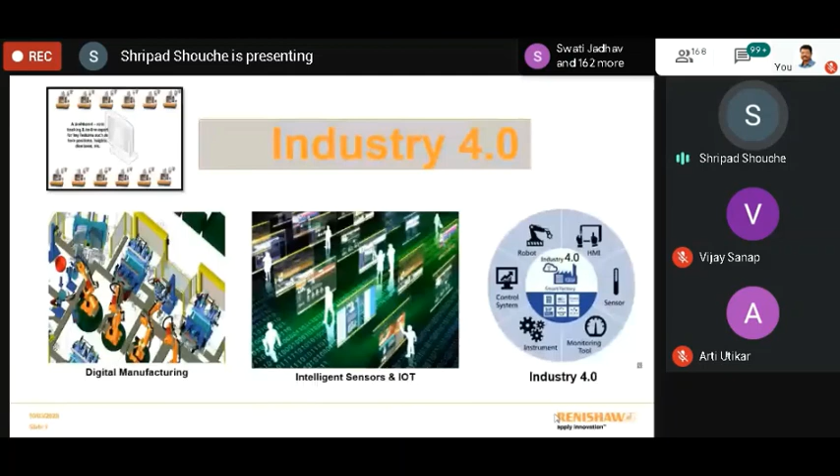Industry 4.0 acceptance happens at various levels - not only the factory, but plant, machine, as well as the individual instrument level. So that is the total session.

So, okay, starting with Industry 4.0. I think each and every student sitting in this session knows what really Industry 4.0 is. In short, Industry 1.0 was purely mechanical, we can say, where steam engines and everything played a major role. Then when we talk about Industry 2.0, mechanical along with electric energy played a role to increase efficiency.

In Industry 3.0, basically robotization got added, automation got added, but all the activities were still put together with different roles. Now we have achieved mechanical, electromechanical, as well as automation, but still there is scope of improvement, and that's why we call this Industry 4.0, the fourth revolution in the industry. Industry 4.0 is a German word, but other countries use different words, like China calls it China 2025.

So every industry talks about it in a different way, but the overall objective is how to make your existing setup or manufacturing smart enough so that it will work on its own without manual control or manual intervention. That's why they use the word cyber physical. The next video will give good clarity on how Industry 4.0 and the trend has shifted.

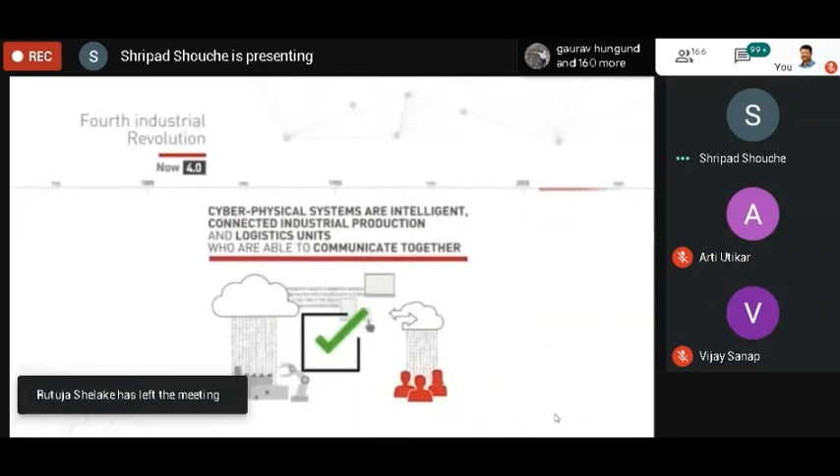If you see this video, whenever a revolution like Industry 1.0 or 2.0 happened, after that revolution the overall output or productivity increased drastically, and that is basically the objective of having a revolution in the industry. That's why now we have reached one level.

Now from that one level to another level, if we need to move, then we need to have some different technology or some intelligence to cater to global needs. If you see the global environment, let me give a simple example from the four-wheeler industry.

If you recall 20 to 30 years back, the Maruti 800 was a very popular vehicle. It was there in the industry or market for 10, 15 years, even now you will see Maruti 800. But if you see today's trend, every 6 months a new vehicle is arriving.

If you see people's behavior also, they are buying vehicles differently. Earlier, if anybody bought a vehicle, normally the tenure would be 10, 20 years of using it. But nowadays, maximum 4 to 5 years, because technology is changing and they want the latest technology vehicle. This is a simple example about the four-wheeler industry.

If you backtrack this, it's a big challenge for the four-wheeler industry to satisfy their consumers, because continuously R&D and new things need to come up to match end user requirements and consumer behavior.

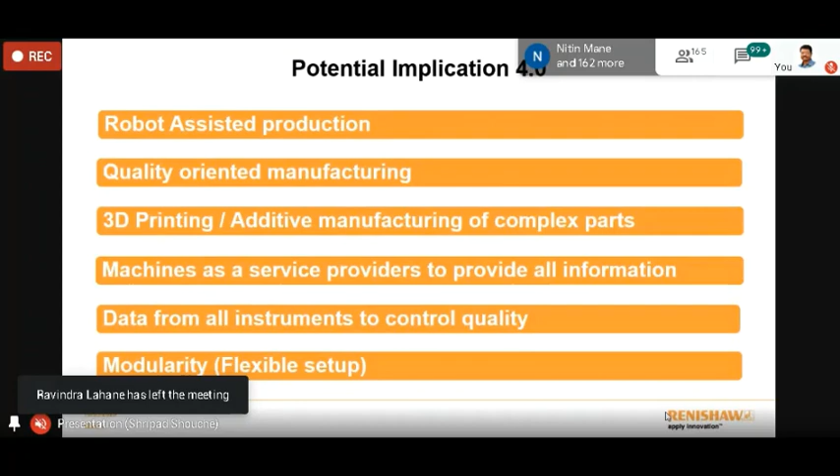And the final part is modularity. Why modularity? Today I launch one vehicle, after 6 months a model has come into the market, and within a year's time it has vanished. So if you see the effect of this one vehicle launch, for that all the component machining, sheet metals, die and mold - everything - people have made investments. And suddenly after 1 year... normally whenever a company makes an investment, the calculation is that the ROI will be 5 years, 6 years, but in these situations it's very difficult. You don't know what the life of this model will be - not just for car or bike, even our FMCG products or consumer durable products, we don't know what the real life will be.

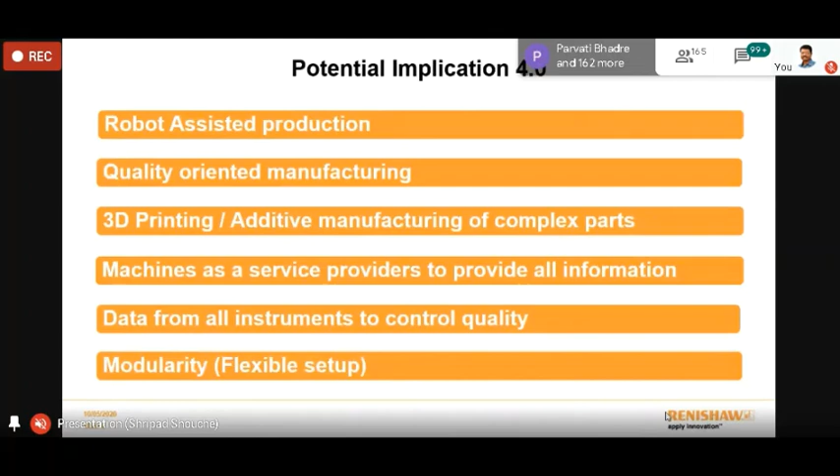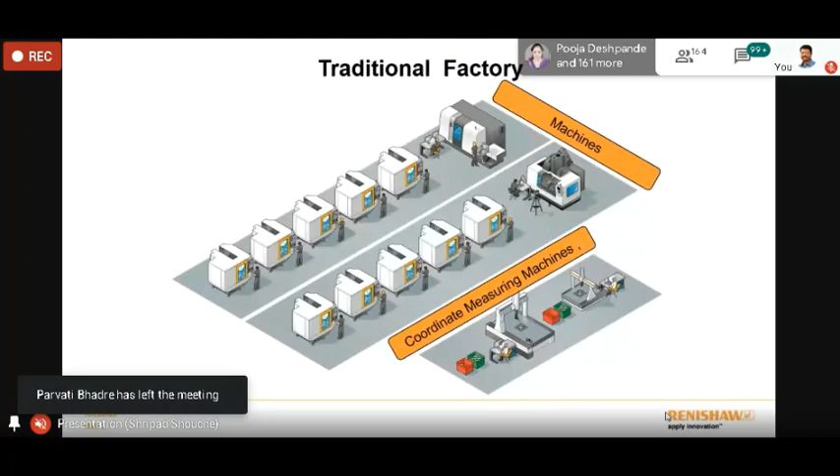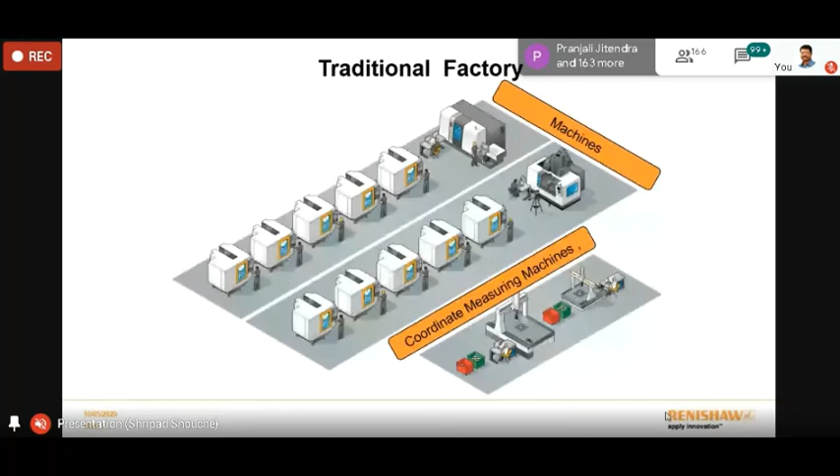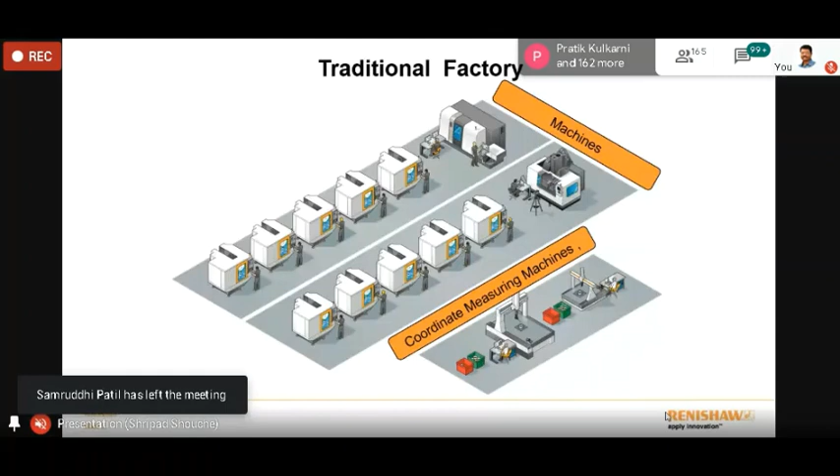And that's why everyone is thinking about how to make their facility flexible - meaning modularity. Modularity means the same machine can produce this component, and if tomorrow it changes, with a very small modification I can adopt other components also. That's why nowadays modularity plays a major role. Conventionally, in early days, people used special purpose machines, meaning that machine would do only that specific operation. But nowadays nobody wants SPMs or special purpose machines, because nobody knows what the life of the product really is and when we'll need to change. That's why people are now talking about general purpose machines, so that if this component or this model stops, at least I can use the same infrastructure for other models.

Now we'll see on the screen - the slide is there where I call it the traditional factory. It's not really a traditional factory, you can say it's today's factory, but in today's session we are talking about the future factory, and that's why it becomes a traditional factory by comparison.

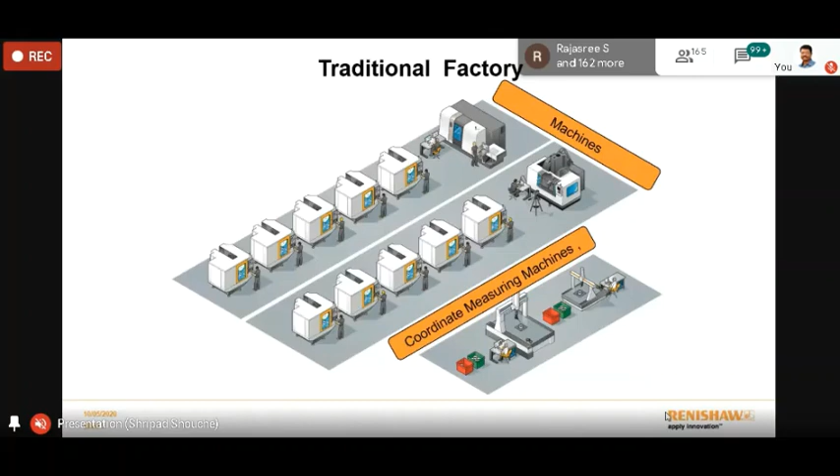If you see why we are calling this a traditional factory - here you see 1, 2, 3, 4, all put together 12 machines are there for production. This is wherever you go in any industry, you'll find somewhat the same overall plant layout or structure. And the reason for highlighting this is today's audience is from first year to final year and from all branches, as well as professors. So I'll try to make it simpler so it gives value addition and clarity on how the industry really works.

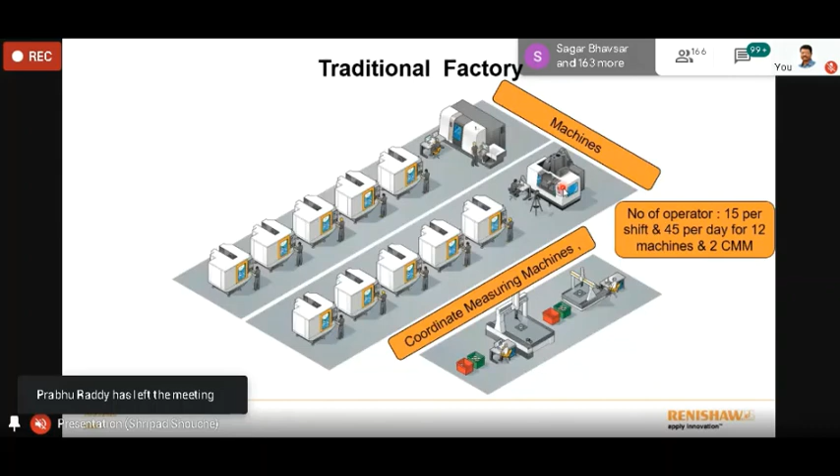So all put together there are 12 machines, plus a few more machines for product development. And if you see the total people - to operate these 12 machines, there are 12 people, plus for quality control there are 2 more for the CMM. CMM is basically a coordinate measuring machine, used to inspect the component to check whether it's in line with the drawing or not, and what the acceptance level is. So at this factory, 15 people are working in one shift. Normally in India most companies work in 3 shifts, so 15 into 3 - for this kind of size of industry, we need 45 people to run it, along with the 2 CMMs.

Now let's see how the industry really works. Obviously the sales and marketing function is there - normally they go to their OEMs to get the order. Once they get the order, they give all the details to the process team. The process team studies what all components and machines are required, and what will be the bought-out items. Then the process department gives that list to the purchase department. The purchase department identifies, okay, I need to buy 5 machines, I need to buy this raw material from India, some raw material from China, US, or whatever country - that's the job of the material department. Then the material department brings all these things and gives it to the production department.

Production person's job is to load all the raw materials, tooling, and everything on the machine and produce the component. So production people's job is up to the production.

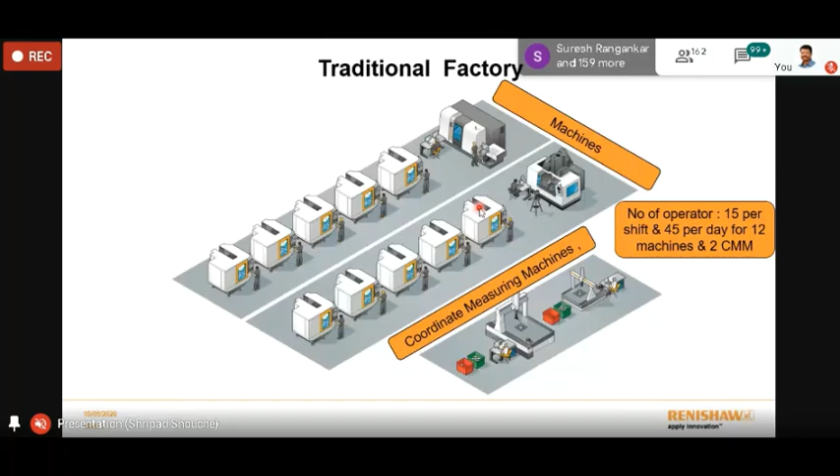If I'm not getting the component as per quality, the major contributor, or where I'm doing the major investment, is the machine playing the major role. In the next slides we will talk about what really we are expecting from the machines.

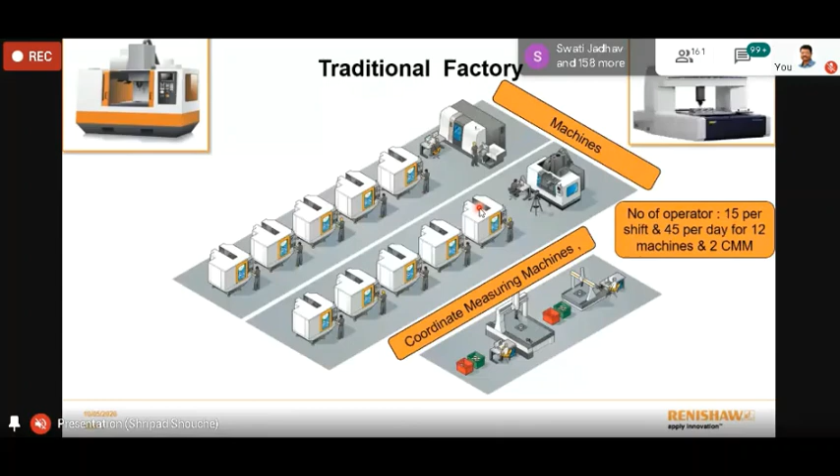Then the second is quality control functions. So from the machine, if we are getting the component, quality control people will check on the quality and certify whether it is correct or not.

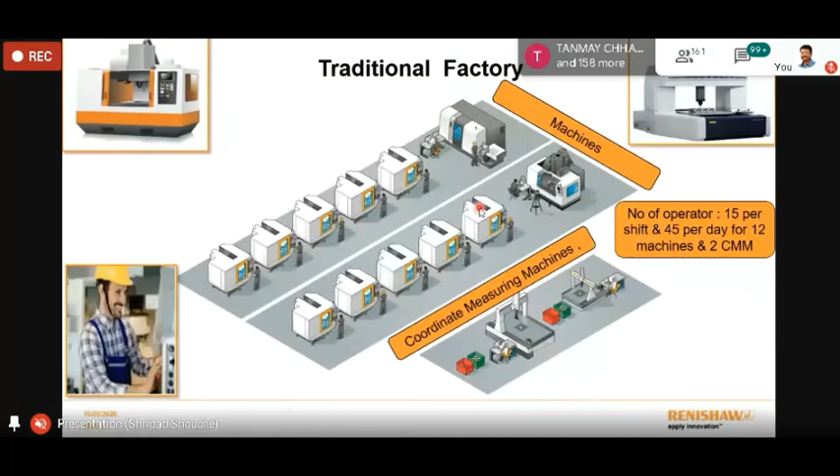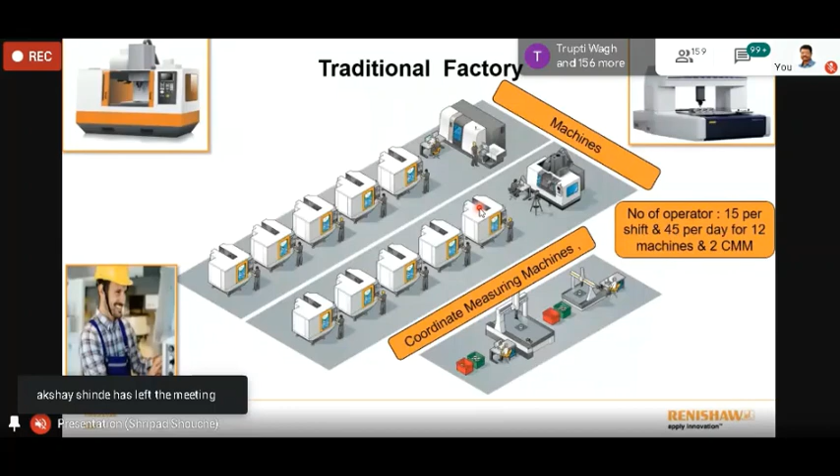The major factor playing a major role in the existing factory is the person, because everywhere the person's role is very crucial. He decides, and based on his skill set, basically the acceptance of quality as well as the production of quality is dependent. That's why the person's role is again getting very important.

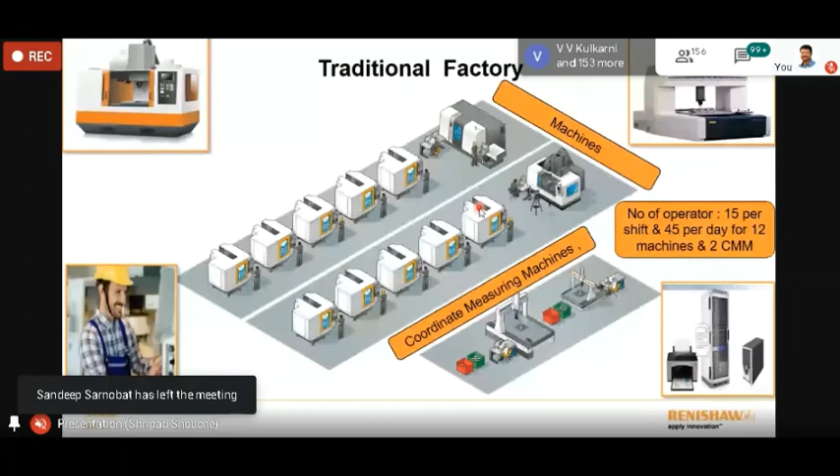The fourth part will be IT systems to exchange the data, because different people, different functions, different data — there's always data exchange. Without data exchange it's not possible, at least at a manual level. So that is the role of IT systems, or the PC systems, software, or whatever we are using.

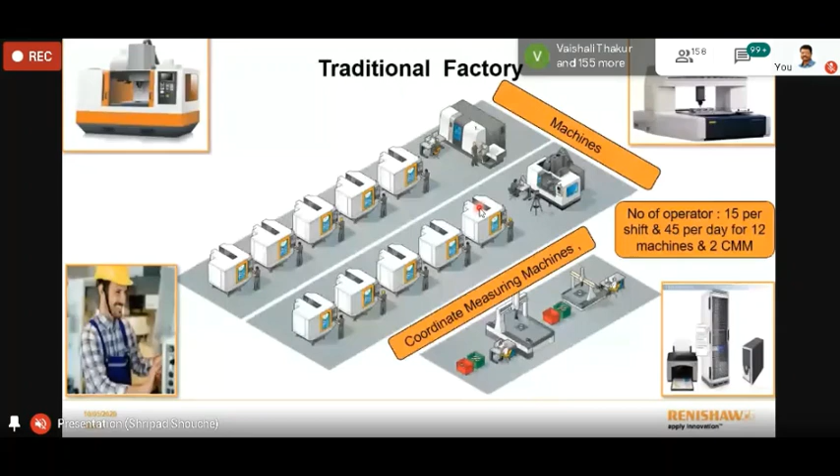Even in traditional factories, many places — because I had worked with all the major OEMs in India, automotive, aero, as well as their supply chain — I had seen many places where robots are also integrated by replacing the man.

But the existing mindset is that robots are used only for loading and unloading; there is no much intelligence added. In a few examples I had seen, robots give a major contribution to producing scrap rather than the right component, and the reason is there is no intelligence.

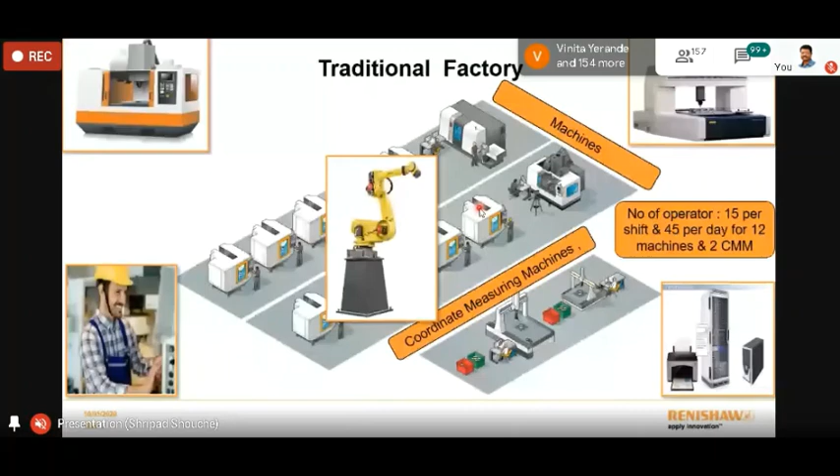That's why now we'll just see in short what really is the expectation from each individual. First, let's talk about the machine. Yes, in early days it was tape-based machines or manual machines.

Now that machine has shifted to the CNC machine. So CNC machines or CNC control have been added in the machines. Does this really mean that now my machine is intelligent enough to take all the decisions?

No, because the difference between these two is: earlier the machine was operated by people. Now the machine is operated using a servo motor, and that servo motor is supported by a CNC controller, where all the different softwares are there, each giving from their own expertise.

Machine manufacturers like Fanuc, Siemens, Mitsubishi provide various controllers, and even PLC-based systems from Siemens and others play a major role. So what really is expected from the machine is to cut the component as per the instruction of the operator.

The machine doesn't know what your requirement really is, because the inputs to this machine are the CNC program, component loading, and tool loading — without the tool it will not cut the component. Loading plays a major role, and then the final factor is the operator.

So if you see in today's world, where all the control at present or in the existing traditional factory lies is with the program. You can control the program, and the loading/unloading of the tool as well as the component is controlled.

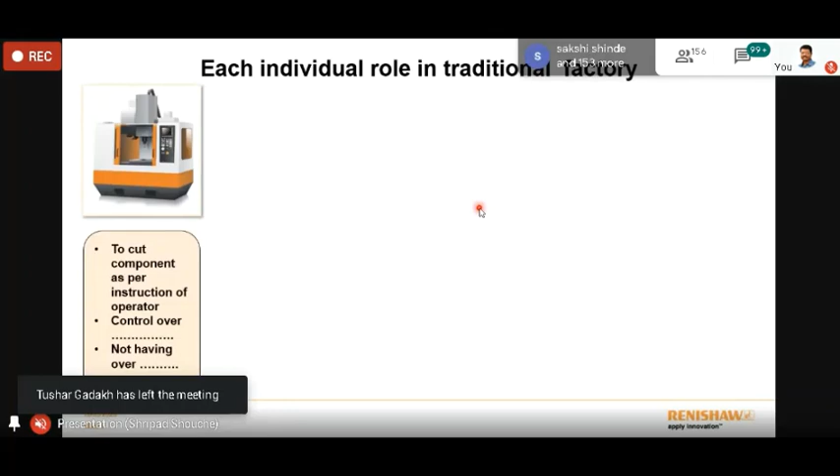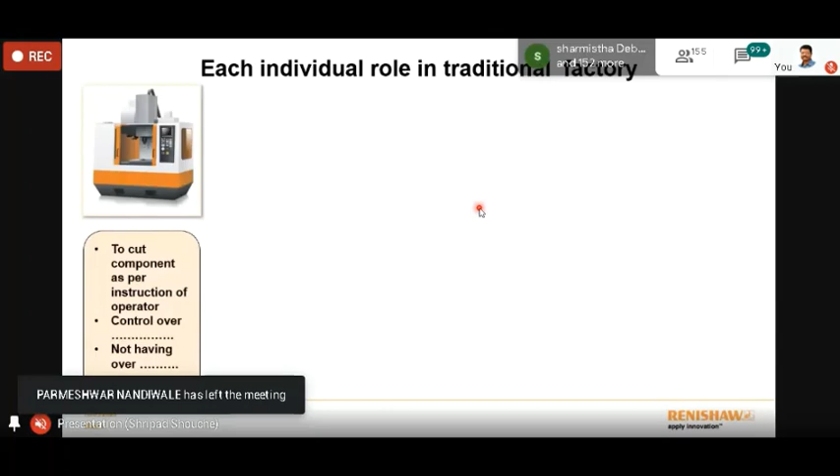But if you see the internal part — whether the oil is finished, don't know; tool worn out, don't know; tool wear, don't know; machine is continuously on, but whether it's cutting a component or not, don't know. So many things are there where we have control, but most of the things we don't have any control over. That part we will discuss in the next slides, where we talk about the Industry 4.0 setup.

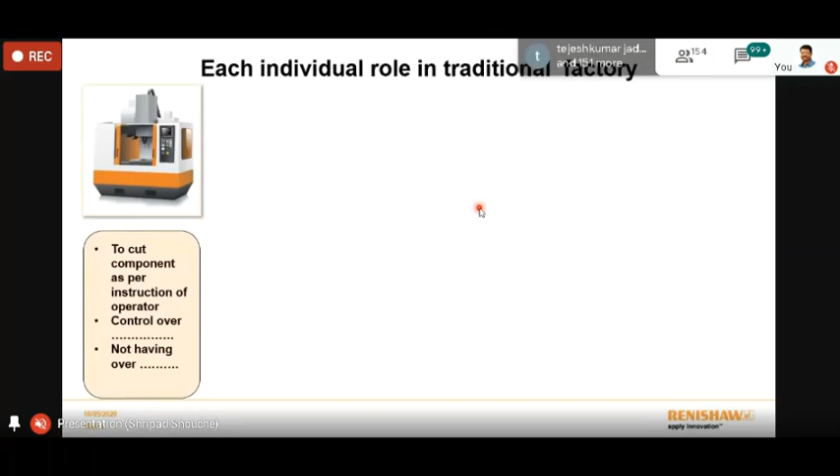Similarly, CMM — this is the pictorial view of the quality control setup. So the objective is to inspect the component as per the program made.

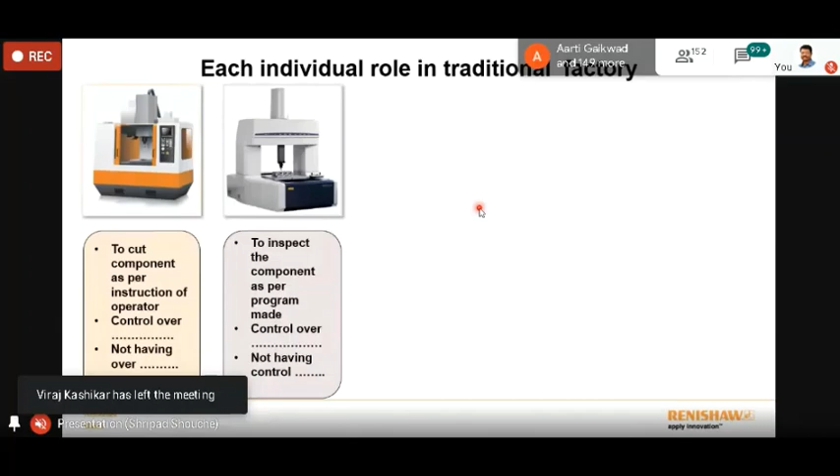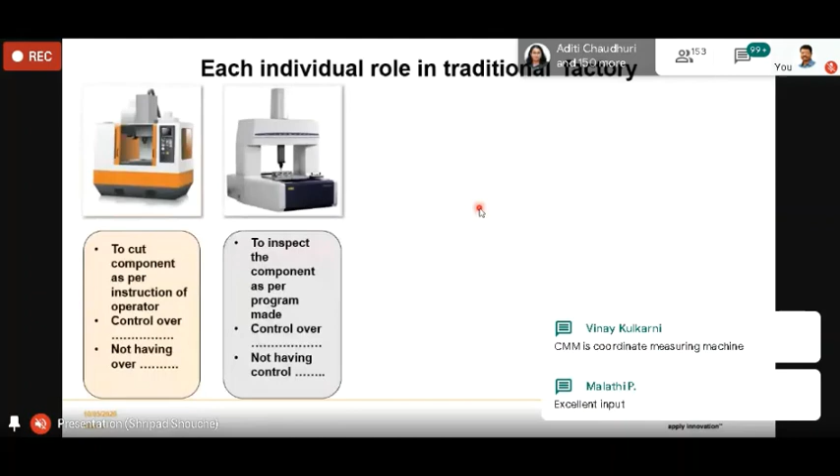If you see everywhere, there are limitations of the person or the program, whatever it may be. There is no intelligence, so whatever the skill of the program or the person, it will give you the output accordingly. The same instrument will give a very good output with a skilled person, and the same instrument will not inspect the component properly because of the operator's skill.

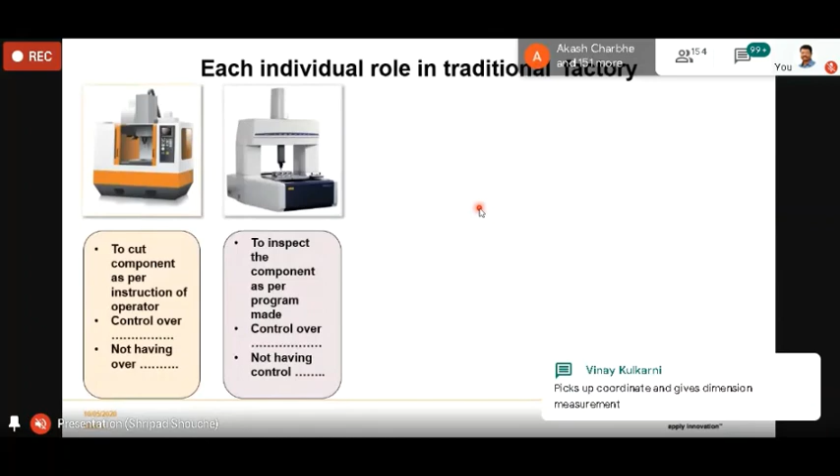And that's why if you change the operator, you will find different behavior and different results from the same instrument. That's why in few areas you can run the program as per your instruction, that is control, but in quality control rooms you don't have control over the manufacturing, so you won't automatically get the right component from the machines.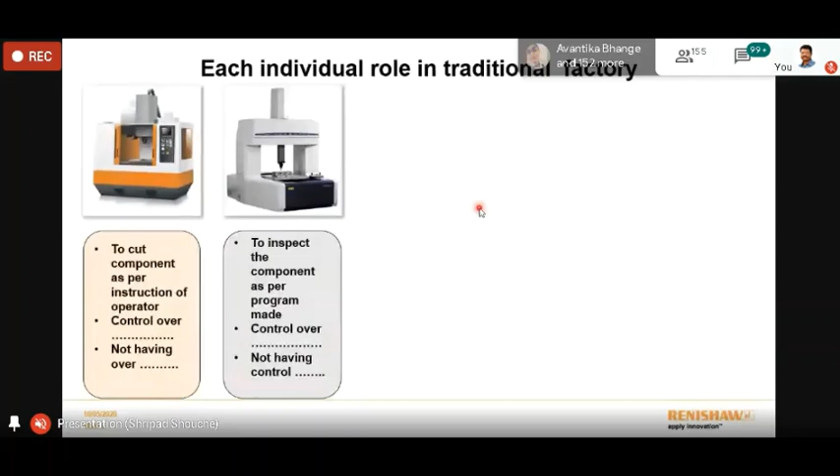So in some places there is control, in some places not, and that's why we were discussing how Industry 4.0 plays a major role and contributes to improving productivity. We talked about machines and their expectations, quality control like CMM or whatever instrument, and their control. The third major role is played by the person.

At present, the existing facility is fully controlled by people everywhere, and it depends on skill. I have seen many organizations where, just because a person is not available today, they are not starting production or not fulfilling the requirement completely. So if you define the operator, he performs work as per his wish or as per instruction. His wish means behavior comes into picture, and instruction means the manager's role comes into picture.

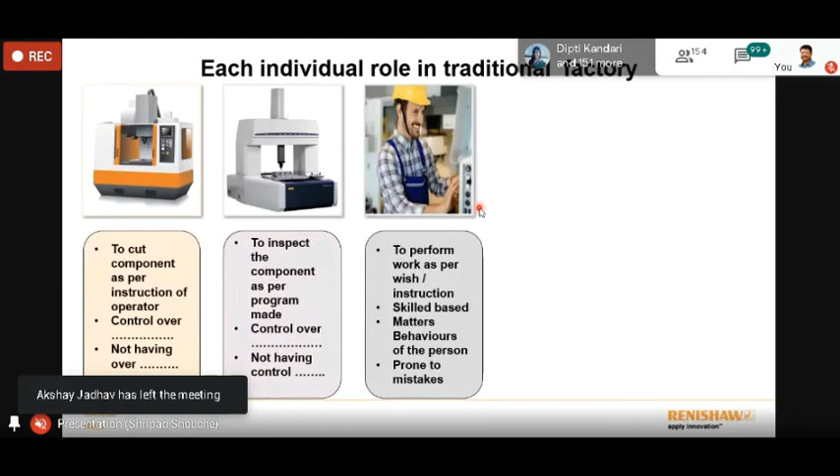So who is best? If the person's behavior is good, automatically he will give better productivity, or if the supervisor is good, you might expect very good productivity. But if both are not there, or if one is missing, you cannot have control over the existing factory or facility. It's purely skill based. If you are missing the skill, you cannot expect the same level of quality.

And why I am highlighting this point is that now globalization and export quality norms are very stringent, and we have seen that normally those who are doing exports are doing 100% inspection. The reason is, if a single component from that container is rejected in Germany, the whole container will get rejected, and it's a big loss. That's why, due to skill dependency, people don't have trust, and they are doing 100% inspection.

Behavior plays a major role. We have done various studies, and in first shift, second shift, third shift, even with the same people and same man-hours, you will not get the same productivity. Always the third shift or night shift has challenges of productivity.

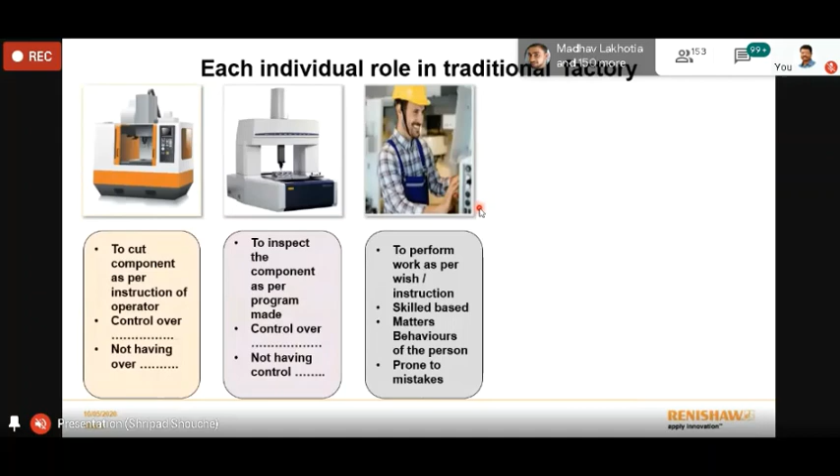And the main thing is mistakes. Small mistakes will change everything. It will damage the machine, or it will damage the component, or it will even damage the impression. So that's why people play the major role in achieving the objectives.

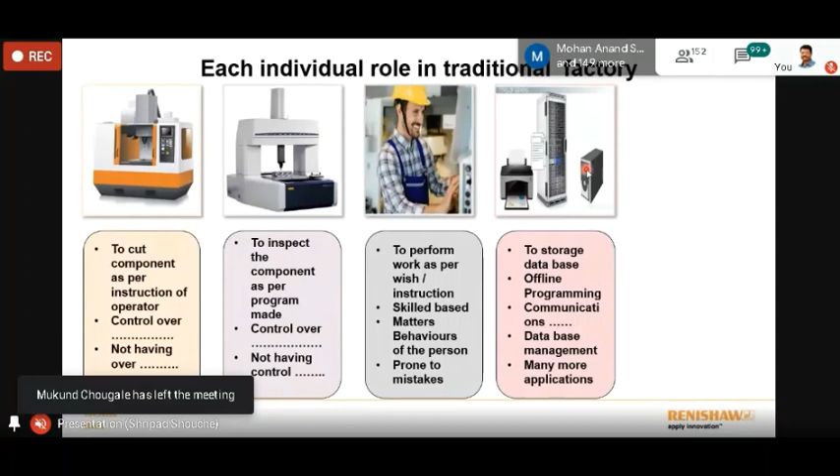Then the fourth part: already we are using IT systems in the existing manufacturing setup where PCs are there, servers are there, software is there, but their main objective at present is storage database, offline programming, communications between various departments, and even directly transferring data. At present levels we are doing database management to store all the data in soft format, and many more applications are used by IT systems.

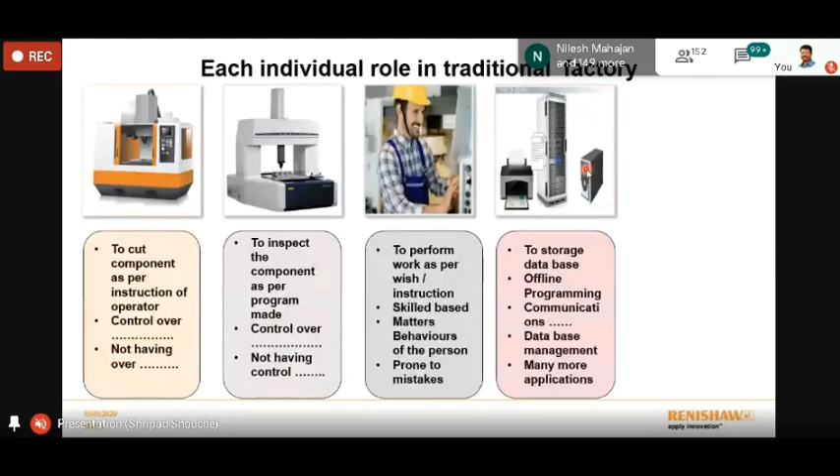And whenever we talk about robots, it is not only the robot. A robot is again a machine that works on a program, so it's about the intelligence of the programs. But those programs are not intelligent enough sometimes. So in many places the robot is doing just loading and unloading work, and where quality or the manufacturing process is not in better control, robots produce more scrap and more accidents, and that's why even in India and globally, people are thinking how to adapt robots.

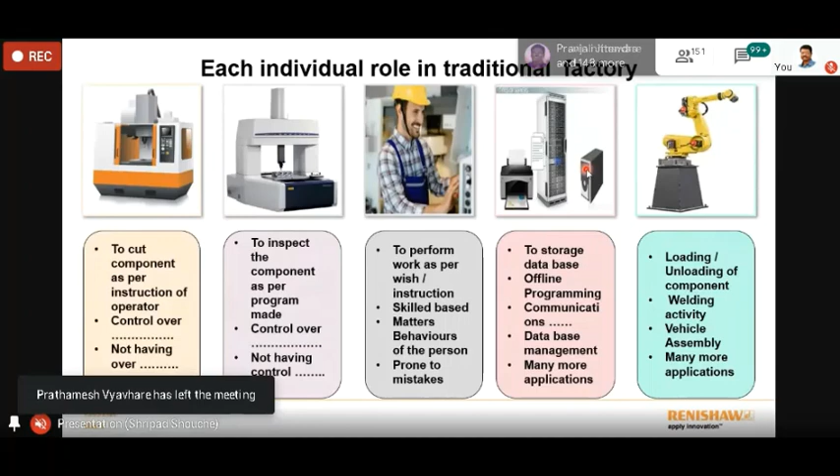Okay, in welding, the acceptance level is very high because it's a harsh environment, difficult for people in terms of temperature and everything. So there, people are using robots for repetitive work where quality control is not critically required. That's why in welding, if you see any automotive company in the world as well as in India, many places you will find robots doing the welding activity.

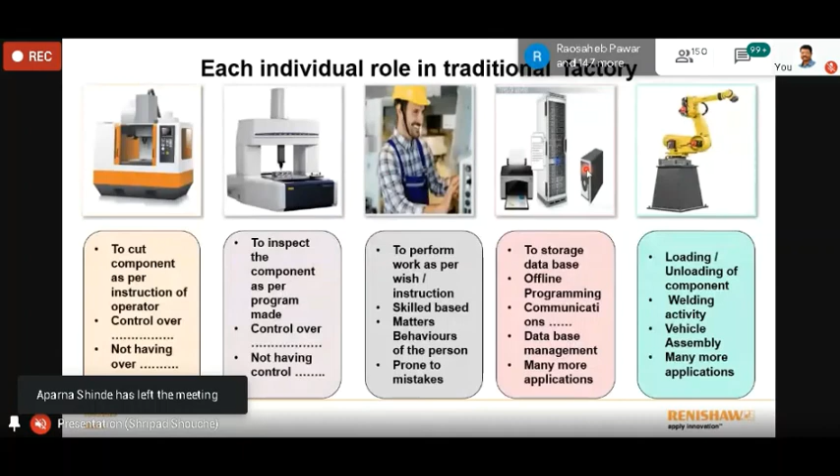Even vehicle assembly is one more area where automation or robotization plays a major role. But people are still struggling to adapt robots in manufacturing because of this intelligence issue, which we will discuss in the next couple of slides.

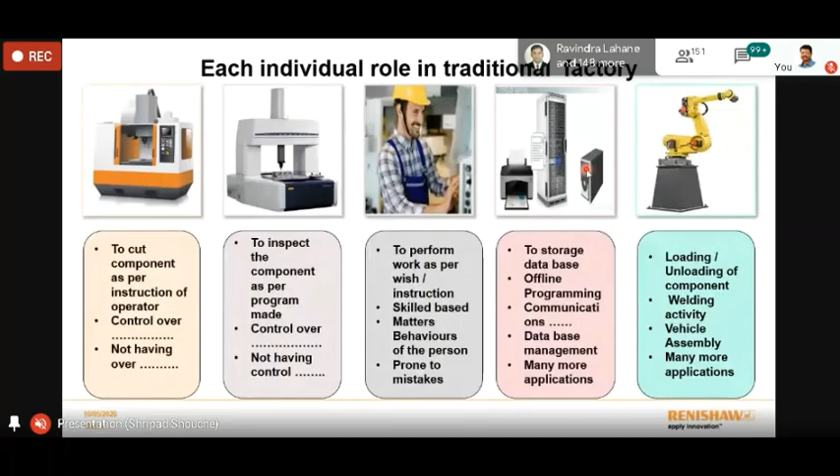So now we understood what really the traditional factory is, and why we call this the traditional factory, because it's been 2 days, we need to move further for the future factory. And when we talk about the future factory, what does it really mean, or what does Industry 4.0 mean?

Whenever you talk about Industry 4.0, there is no lower limit or upper limit. Every industry, even in India, is exploring how to achieve Industry 4.0. They are identifying the challenges in their existing factory creating problems, or because of which they could not achieve the productivity level or global requirement. Step by step, each industry sets up milestones to reach the desired level, and that's why the plan is made. It's not that suddenly full factory automation happens, because investment and other factors are involved, so they do this activity slowly.

So now, the future factory. Why do we call this a future factory? We will see what variables are contributing to making this factory a future factory. First point: if you see the number of people, 1, 2, 3, 4, 5, 6. The machine is an automation line, and only one person is operating it. Here the development work one person is doing, maintenance one person is doing, and here some activities are going on, again only one person. If you see the CMM room, rather than 2 CMMs, there's only 1 CMM, so one person.

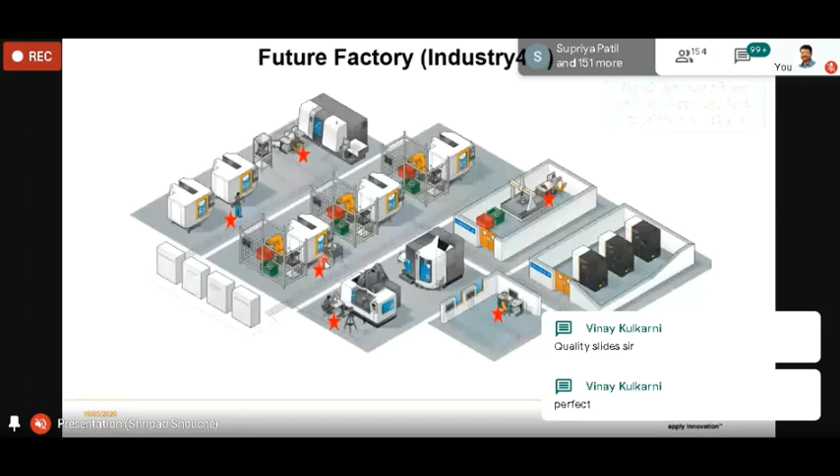So first, the major impact: very few people, and if you see in 3 shifts, if 1 person is operating, what is the contribution from their side? Only software interlocks and everything. So 6 per shift. If running in 2 shifts, max 12 people. In many cases even the 3rd shift is not required, and globally they call this a 'lights off' facility.

In the whole 3rd shift, all the factory lights are off and everything is still working. In Vijay sir's presentation also he has used this word. So 'lights off' is possible in Germany or other parts of the world. Even our factory in the UK works on lights off, and I'll explain how that works.

Next, machines. If you see the earlier machines and these machines, it's the same machines. So what has changed? The machine is the same, but now various features are added. In the industry, many companies provide software in the machine so it gives data directly to the server, whether tool life is over, oil level has gone down, whatever is required, the machine demands it from the server or the people operating it. The machine will even talk with the robots and other systems, so everyone jointly works with each other to complete the parts.

So there's the independent robot and the connected robot. In many places, the robot is the master that drives everything. We are adding lots of intelligence into this robot software so the robot can take decisions itself, like whether to keep a collected component in the rejection bin or acceptance bin, when to give instructions to the gauge, when to give instructions to the CMM, when to give instructions to the machine. So everything works in a closed loop system with exchange of ideas and decision-making capability. For CMM, an additional word has been added: gauging.

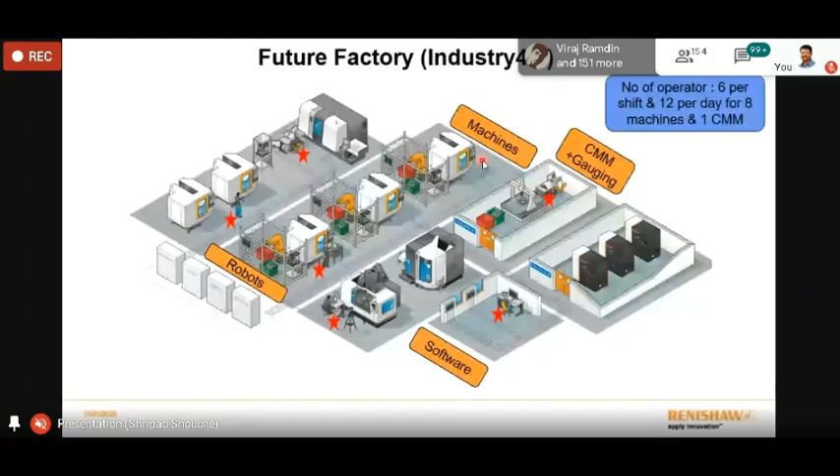Because quantity reduced, CMM becomes one, but inside the cell, some systems are added - that is a gauging system. Earlier, the machine would cut the component, it would come to the CMM, then CMM would check after 2 hours, and then after 3 hours the report would go to the machines for correction. By that time, in those 3 hours, I might have lost all the production.

To avoid this, inside the cell an inspector is there, but rather than a person, it's a machine - a robot operating these things. Whenever needed, it will throw that data to the machines. A gauging system will inform the machine to stop or make corrections to produce that component. So this cell or couple of machines will always produce 100%, because of the exchange of data, exchange across all the systems.

Then based on the process, the person designing these systems needs to decide what all intelligence to add. And if you see here, the software and the cockpit station, I intentionally showed it in a different area. The reason is, I will give you an example.

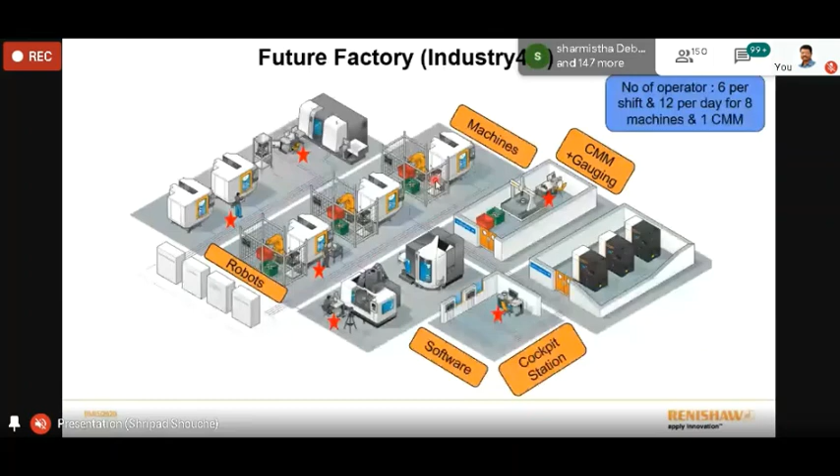Our Pune Tech Center - in this software, we are seeing what our machines or demo centers in China, US, UK are doing, how many hours it has worked, how many components it has checked. So now it becomes very simple, because one person in charge of the global tech center, sitting in one office, can watch the utilization and everything.

So is it man dependent? No, because if you run the machine, automatically data goes into that software, and he will see the productivity, the performance and everything. And that's why this software cockpit station plays a major role - here you easily get to see how the performance really is.

And they put a CCTV camera. In the early days, productivity was the problem, so they added the CCTV camera. Then the operator came to know someone is watching, and because of that, efficiency went to a second level. But they made it smart - now they start the machine, stand in front of it, but don't actually cut the component. So how to identify this? This software will tell you whether only the spindle is working or the total machine is working.

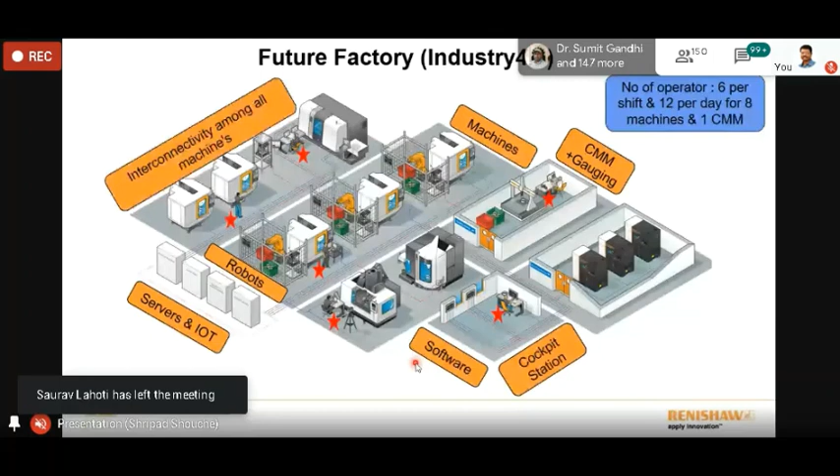A single system everyone will believe, otherwise one department will produce one report, another will produce a different report, and management will get confused. That's why this plays a very important role, and that's why all systems in the factory, not only the machines but across departments, need to talk to each other with the help of software and intelligence systems, so that it will be far easier to take decisions. So that is the various roles.

And in the additive manufacturing part - additive manufacturing also nowadays plays a role in the existing manufacturing setup. And as I told you, to give confidence and support to what I have discussed with you, I'll give you a small example.

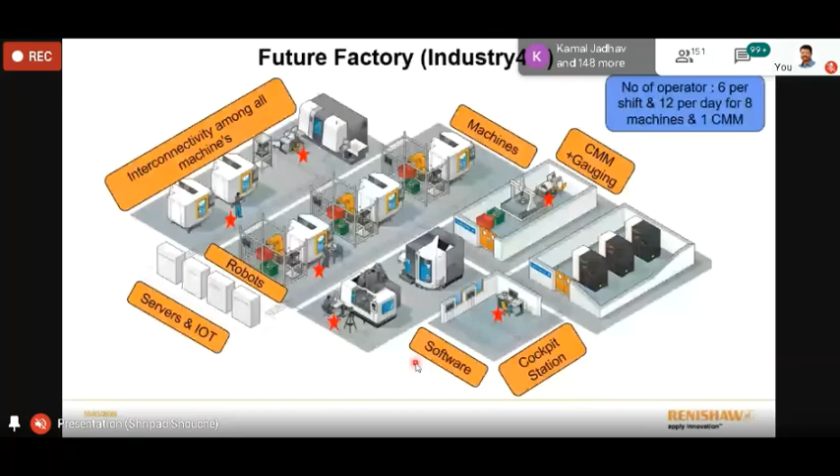Our UK facility is 40 years old. In this facility, we produce only high quality parts - 50,000 is the variety, and it's very difficult because it's all high tolerance, high quality parts made with the help of people. Over the period - now we talk about Industry 4.0, but over the last 20 years our people have done this, because in Europe these resources are very costly, people are very costly, and that's why they always think about how to automate. From European countries, automation has been highly pushed. And if you see at the bottom, now 80 machines are operated by 10 people - a 1:8 ratio.

So how are we achieving this? Here, now the point I mentioned, lights off, that also gives you the clarity. This video will explain what really we have changed. As Vijay sir mentioned, different sensors are playing a very important role, because for identifying each thing, sensors are connected to servers to throw the data. So with the help of sensors, some systems, automation agents, it is possible to have that Industry 4.0. I'm just running this video. This is our facility, and that's why we are showing it openly.

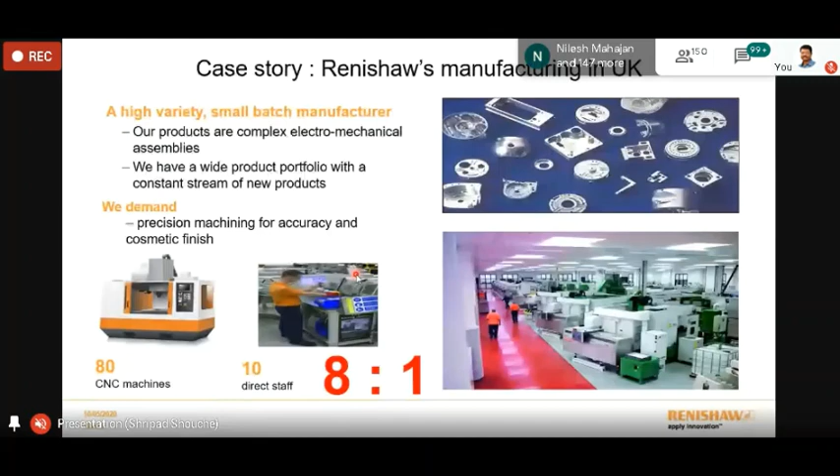Renishaw has first-hand process control expertise, which helps manufacturers worldwide apply high-level, productive and cost-effective machining.

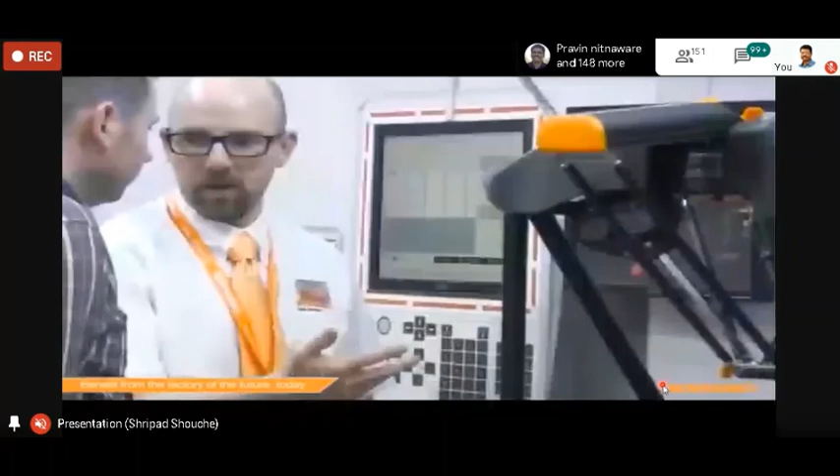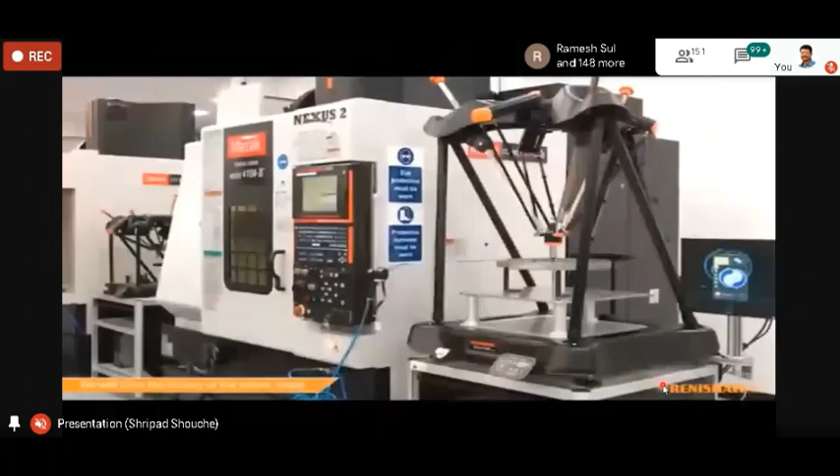Our technologies enable control critical for smart manufacturing. We develop products which solve key measurement challenges, like maintaining system accuracy without sacrifice, because measurement speed can be critical to achieving high levels of throughput. Renishaw probing systems with multi-sensor capability capture data rapidly, reducing measuring time and providing actionable data more quickly. Renishaw equipment such as machine tool probes, gauging systems, and calibration devices provides the data that enables intelligent decision making. It's important that metrology devices are easy to use, and the latest smartphone and CNC controller apps give users easy access to shop floor metrology.

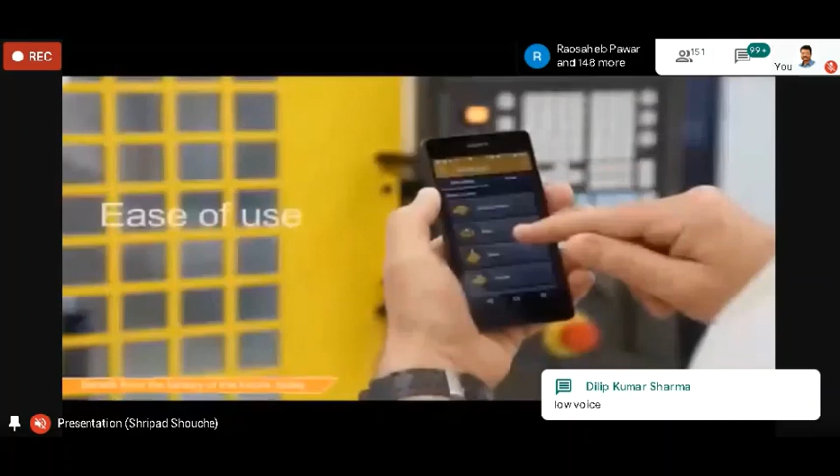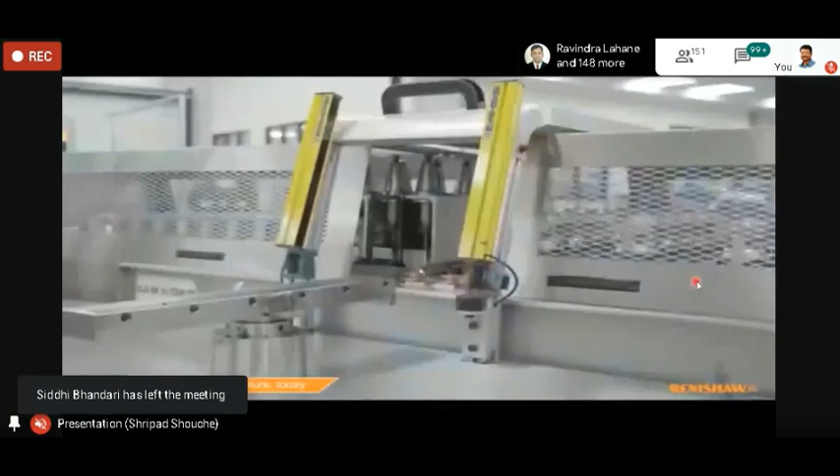Manufacturers need the flexibility to repurpose equipment to accommodate shorter product life cycles and growing product mix. Renishaw devices are programmable, meaning they can accommodate changes to production scenarios as processes are developed and proven.

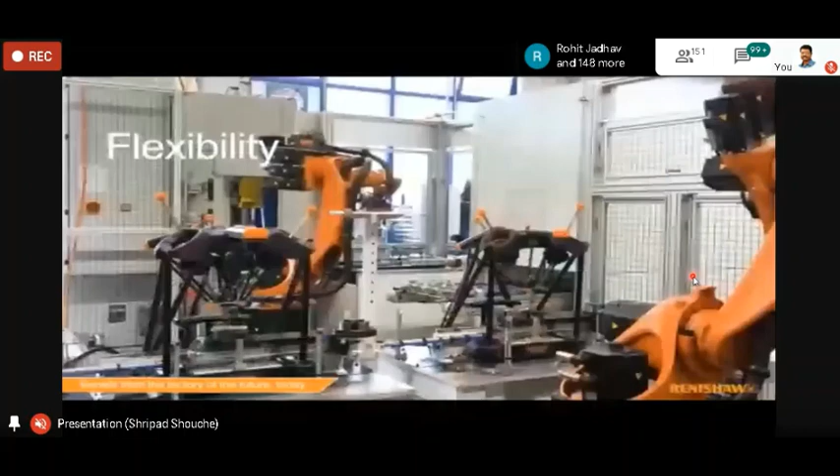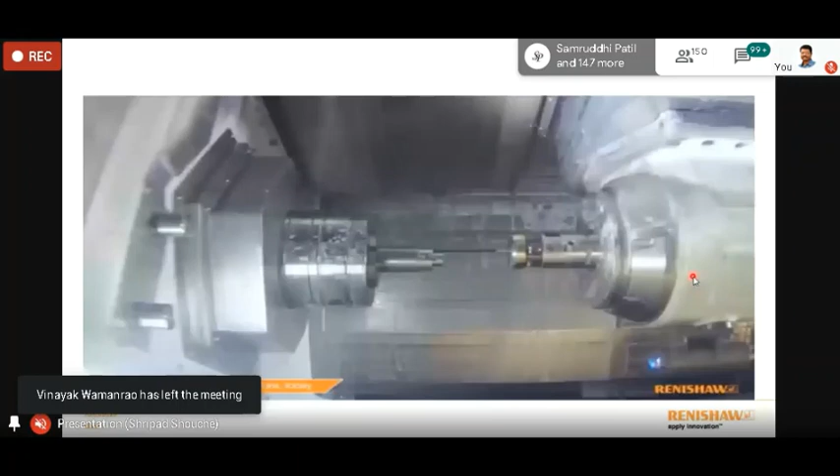So if you see in this video, who are the major players making this factory smart? It was sensors, software, system connectivity, so that each one talks to each other. The reason I'm showing you this video is that now you might feel your people are not there, but are we creating unemployment because of this? No, the level of job requirement is getting changed. Earlier it was low skill. Now because of these things, people are talking about more intelligent work, kind of software making, interlocks, or sensors. That kind of requirement is getting changed.

And to make any factory an Industry 4.0 factory, the process will be: first identify because of which element you are losing productivity, or what challenges are stopping you in the global world. Then, based on that, you need to define the logics, what all I need to add so that my factory will be intelligent, so that my performance will improve, and I will make my customer happy. So that's why each industry is different in achieving Industry 4.0.

So the last part I will cover is additive manufacturing. Why people talk about or correlate this with Industry 4.0 is that earlier it was subtractive manufacturing, now people start talking about additive manufacturing. The reason is, in early days additive manufacturing was restricted only to R&D, but now it has shifted to the factory floor, meaning it has entered the production environment. Why this additive manufacturing? Once you start the button, it will produce, no need to do any manual work. That's why normally the metal printing time is 10 hours, 12 hours.

And if you recall the previous slide, the future manufacturing zone, because that software person only is driving this. It is connected through the server, only load the powder, start the button, that's all. 12 hours, 15 hours, whatever may be the cycle time, you will get the component. That's why nowadays it has moved from the research lab to the factory floor. Earlier it was only used for prototypes because various challenges were there.

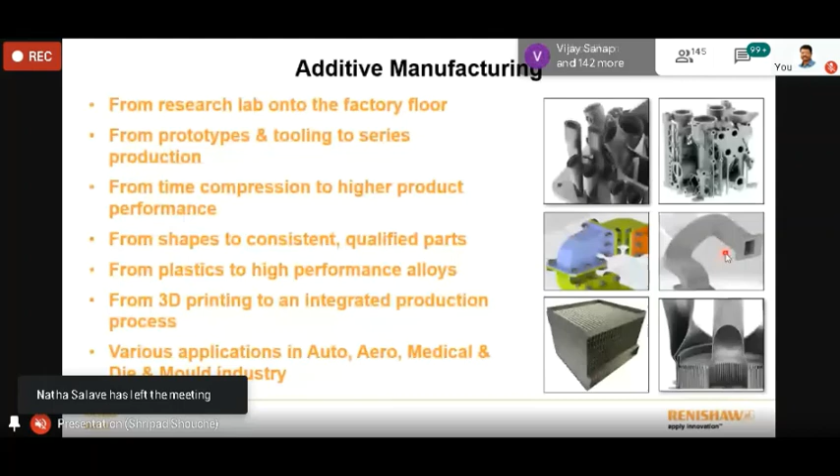Even after this seminar, you can just search on YouTube. Renault has published a very good video where they manufactured one full vehicle using 3D printing. Earlier the weight was somewhere around 400-450 kg with joints or assembly of somewhere around 250-300 components. After 3D printing, they reduced the weight from 400 to somewhere around 350, and they reduced the number of components from 250-300 down to 150.

So the benefit here is weight reduction, and this again plays a major role in the BS6 part also, which the automotive industry might have heard of.

Then one more part is shape to consistent qualified part. If you see this kind of example, this is the heat exchangers. HiETA is one global company manufacturing heat exchangers. The old heat exchanger and the new heat exchanger, the performance has drastically improved. Similarly, if you see this manifold, the old manifold versus the new one, the weight has reduced, material requirement has reduced, and the performance has improved drastically.

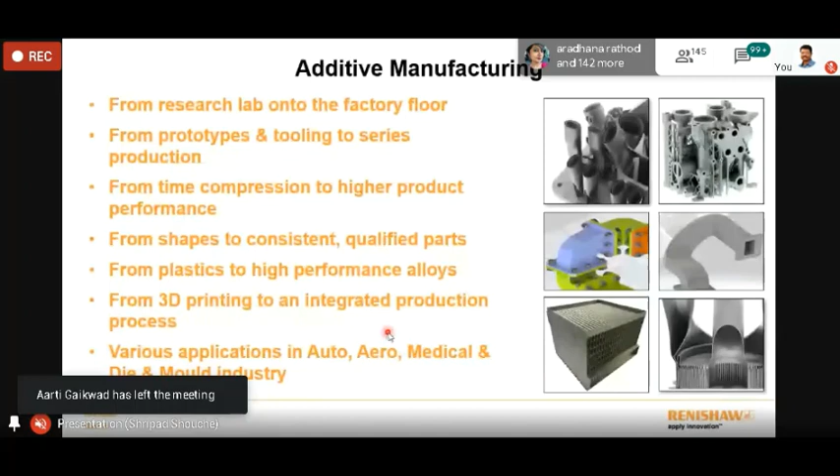Then 3D printing as an integrated production process is getting added. Globally, we have seen even some encoder companies - earlier they were giving the different encoder, mounting bracket, and everything separately. So instead of doing lots of assembly, they made it a single integrated part.

The benefits of additive manufacturing, in terms of medical, because replacement part, fast production and everything is a very good benefit that medical has achieved, and even ease of fitment in the body or the comfortness in the body is playing a major role. The major area in aero that people are talking about is weight reduction as well as reducing the cost of the component, being all titanium and that kind of component.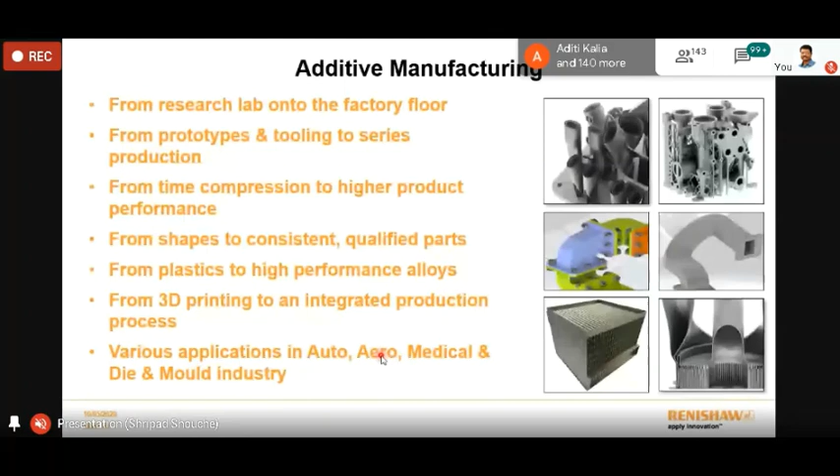In the die and mold industry, basically the application people are talking about is conformal cooling, because heat exchange is the major area there. In the auto sector, the maturity level has not reached that level. The reason is component size as well as volume - these two are the major challenges. But people are working on reducing the powder cost, making available various alloys so that component cost will go down, and finding solutions to increase the productivity of the machines. That's why machines with multiple lasers are coming. So that covers in short what really it is and all the benefits.

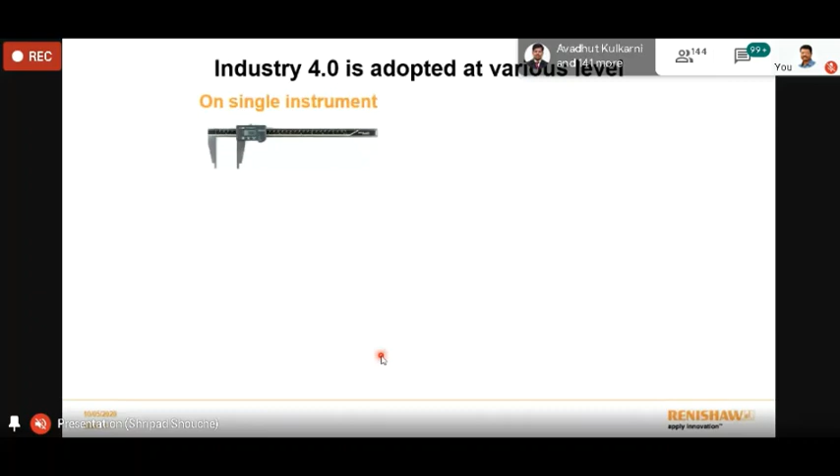As a final summary, Industry 4.0 is adopted at various levels. What does it really mean? I'll just quote one example, I will not name the company - it's a very well-known company in the automotive field. On their shop floor, various single feature parameter inspection instruments were there, and their challenge was that people were recording the data manually. How to get it centrally? So they thought, and made it intelligent - all these single instruments connected with Wi-Fi. Now whenever an operator is inspecting the component, automatically the data goes to the server.

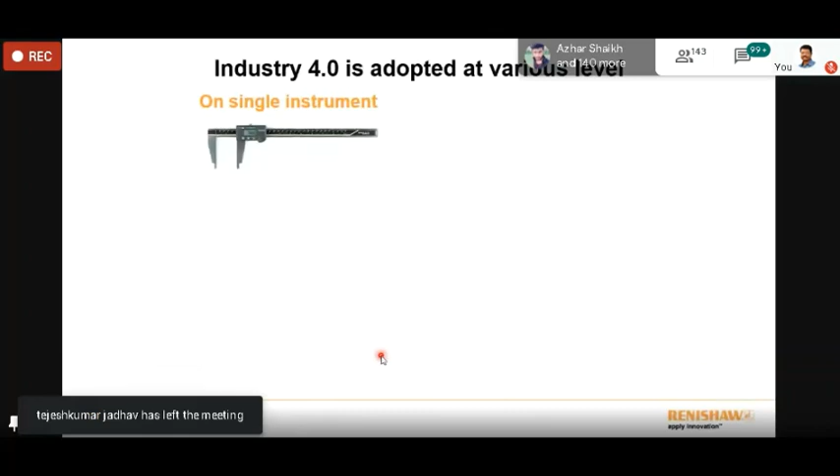So is Industry 4.0 restricted to the factory level? No. Based on your challenge, your requirement, you need to take the decision on where you want intelligence and these things. That data is directly maintained, and one person is observing what is going on.

Second area, going further, is individual machines. Now lots of software is available in the industry. Even each machine manufacturer is giving this kind of software which will communicate - even the machine will tell you the information: oil change has happened, inspection data, spindle RPM, per day I've run for 8 hours out of 12 hours, what really the productivity is, everything about the machine. So the machine becomes a server - it's throwing all the data centrally, by one place you are getting all the data.

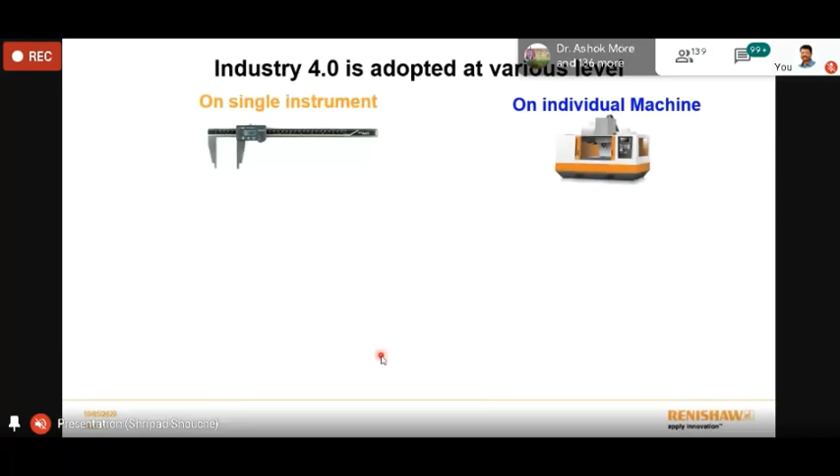That's why people are coming up with new software, more powerful software that gives more data. Going in a broader way on the manufacturing side, where multiple machines, robots, conveyors, gauging systems exchange data among all the elements, share the data, and take decisions - people are adopting this in manufacturing at what you can call the cell level.

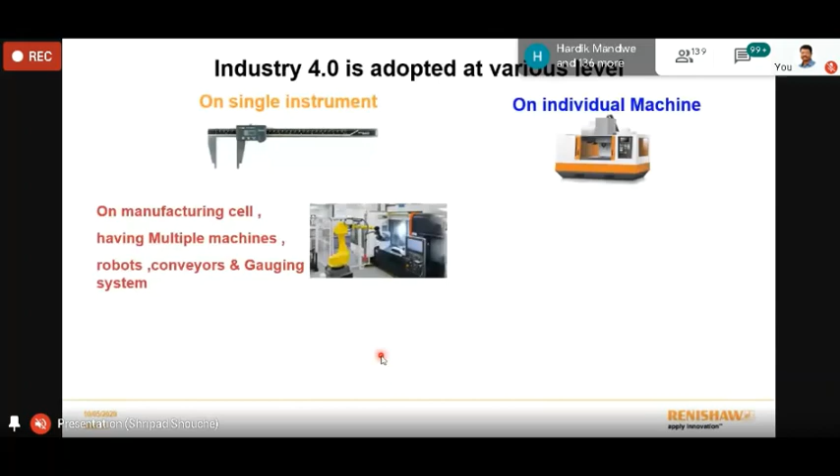And the final part is going to a broader level - corporate level, multiple plants at multiple locations in multiple countries. People are thinking of adopting this. So based on the requirement and based on application, people are using this kind of data to take the decision making. So that's all from my side in terms of Industry 4.0.